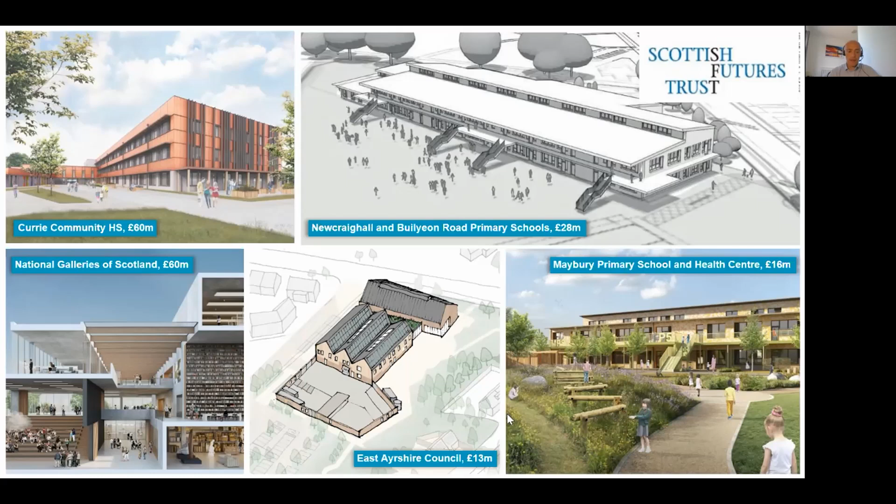setting the cost benchmark for the programme. It doesn't have to be Passivhaus to deliver under that programme, but Passivhaus is the most effective way of achieving the metrics that are required for the funding. So Owen was massively involved in reviewing Passivhaus projects across the UK and establishing how to set up that budget. Okay, so that's who we are in Faithful and Gould.

I'm going to talk now about Passivhaus, and I'm acutely aware that I'm coming at this from a quantity surveyor, cost manager, bit of a project manager perspective. So the likes of Sarah and Jonathan know way more about Passivhaus than I, but one of the things from a cost perspective we need to be acutely aware of is, despite the fact that the Passivhaus standard has been around for over 30 years, the outturn cost for low energy buildings is a relatively new topic.

And quantity surveyors, cost managers as a profession, we like to work top down. So we like something to benchmark against, whether that's a square metre rate, a cost per pupil, a cost per desk, whatever that is. We like a benchmark that tells us this is what's been delivered previously, therefore our costs are within the same ballpark, and we feel comfortable that it can be delivered from there.

Without that data, if we just take a traditional project approach, benchmark it from the top down, and then do what we've often done in the past and add on an uplift for Passivhaus, then that's not going to deliver best value for the project. That's not going to deliver the best outturn cost. And I'm not going to say it's a lazy way of doing it, but it's a very easy way of delivering an estimate of cost.

So one of the things that we've been driving really hard, working with Barry Young, with Ian McLean and Owen and our cost management team, is getting bottom-up analysis from the word go. So trying to build a picture of the project right at the outset, and trying to work with teams like Archetype and the M&E engineers to establish what's the extra over aspects that we need to be including for in this particular project. So it makes it more project specific as we go.

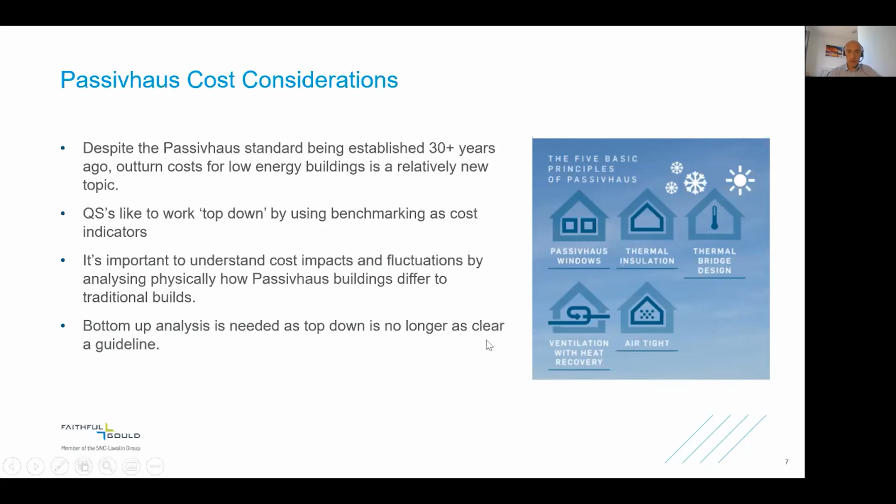This is the sort of thing we need to focus on as a project. We can get focused on the additional cost items, which I'll talk about shortly, and lose sight of some of the simplicity that gets introduced through Passivhaus, some of the benefits we achieve through it. So I've shown this here as a focus to keep in our minds.

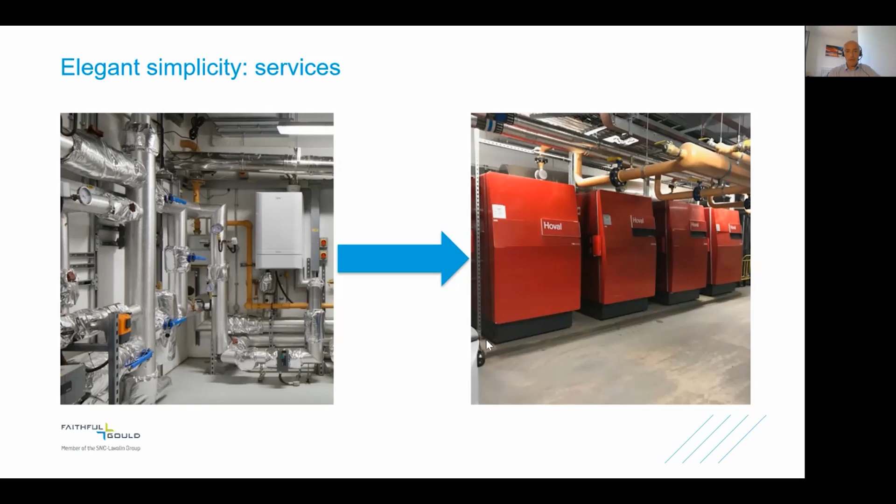If we take form and orientation, and go back to the poll about early design decisions, I think that's a fascinating outcome, because getting the right form and the right orientation in a simplistic manner needn't cost any more money. Actually, what we've seen on some of the projects we're working on is a reduced cost compared to a traditional build, because in a traditional build nobody's really focusing on the efficiency of orientation or form - they're just looking at the shape and aesthetics. So we're seeing benefit there.

When we move round the circle, the facade design and fabric construction - there's no two ways about it, those are likely to cost overall more than a traditional project. Whether that's additional slab insulation, roof insulation, triple glazing, whatever it is, both of those aspects are likely to cost more. What we need to do as a profession, as cost managers, is help make sure those increases are reduced as much as possible.

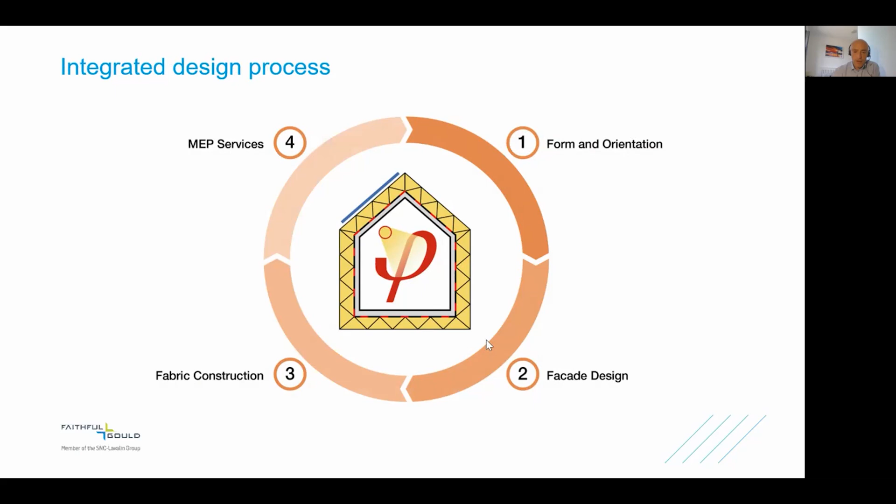And then lastly, the MEP services. Yes, the boiler and heating plant is going to be smaller in a Passivhaus project, which is a massive plus, but there are other items such as ventilation that we're finding are getting brought in, and we're working hard now to offset those balances to make it as close to cost neutral as possible. So we can't get away from the fact that Passivhaus delivers more for your money, but it is slightly more expensive when you look around that circle to get there. Part of the job is making sure we consider that when setting the budget, and that we manage the project to keep costs as low as possible.

So I'm going to talk now about setting the budget. It was interesting going through the thought process pulling together these slides, and some of the ideas that came to mind brought a different way to express it for me. As we worked through, I started looking at some of the projects we've been delivering, whether Passivhaus or traditional, and started to break down the costs.

Interestingly, those are the two areas most impacted by a Passivhaus design and the Passivhaus requirements that happen in the construction phase. So that's where our focus is.

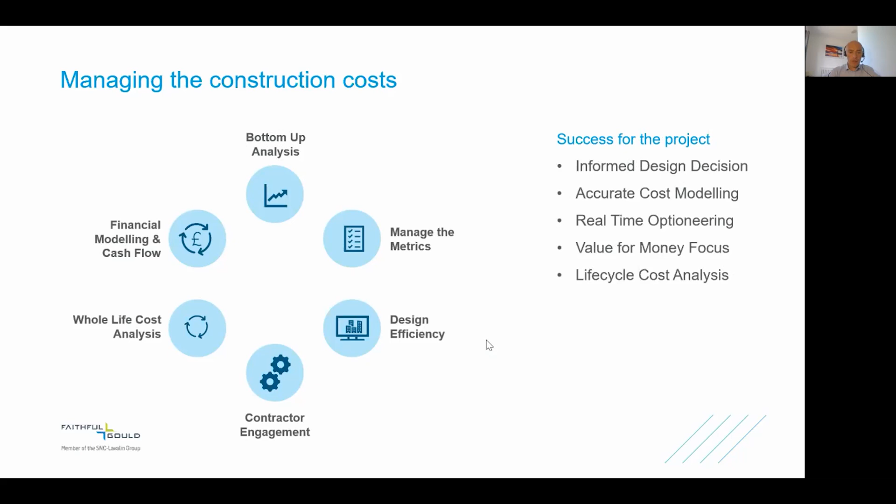Jumping onto life cycle - if there's ever an advert from a cost perspective to do passive house, it's the life cycle cost of that project. We've looked at a number of projects, and one of them: we ran a traditional cost model over 50 years and a comparative passive house cost model over the same 50-year period. It was 55 million for the traditional and 50 million for the passive house project, which - to justify me being a QS - is 10% less. That's the advert for why we would deliver a passive house project. If we could say the capital cost would be 10% less, nobody would ever bat an eyelid. What we need to start doing as an industry is looking at the life cycle cost of a project.

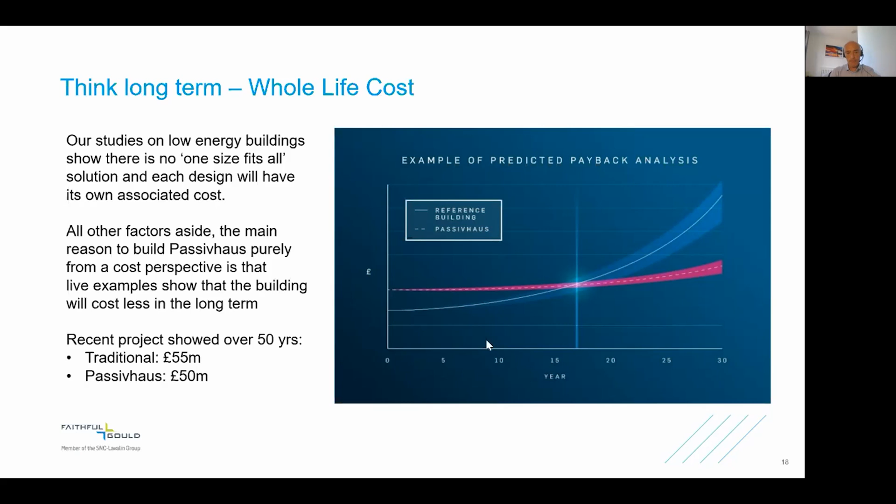So in terms of what I'm going to talk about today, that's the sum total. I do have a couple of practical considerations just to demonstrate where we are.

This is a nice one, going back to the poll again. This is a project we've worked on with Jonathan and his team, and they did some optioneering around the orientation of the building based on the site that had already been selected. Working through these options, they came up with the best solution, the one that was going to give us the optimum way to get to Passivhaus accreditation, which was fantastic. And it was a seamless process - from my involvement, I barely even noticed it was happening.

Conversely, we are involved in a project which had gone to almost stage 2 when the client decided they wanted to take the project down a Passivhaus route. The site had already been selected, the building had already been oriented, all those early decisions had been made, and we were left with the option of redesigning and going back a stage and a half to look at the design all over again, or trying to find ways to cost and engineer around the decisions that had already been made.

And that's when it became apparent - the ease of decision making if you get it right first time, early doors, and the fact that it has no cost impact, and in fact it saves costs if you do it that way.

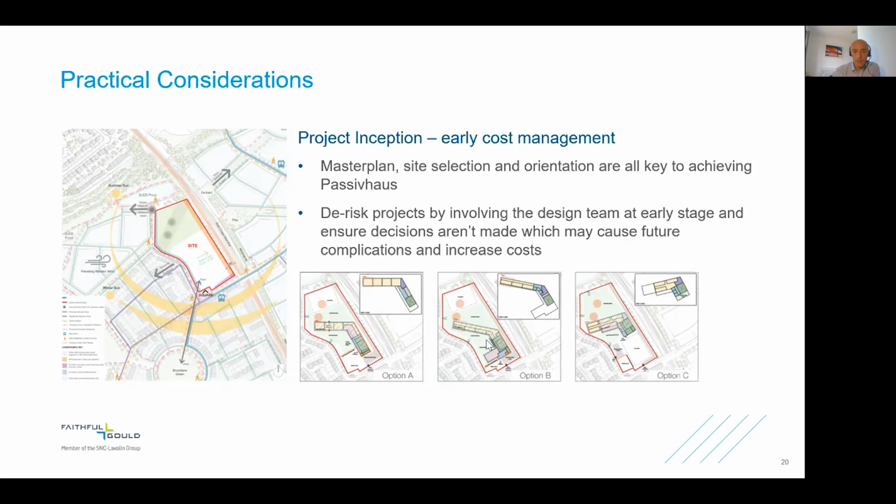Secondly, and just around that early contractor engagement, one of the things we really need to think about is the supply chain. If we're putting out details, construction methodology, and different ways of working to the supply chain, and they either don't understand it, or don't have the time to understand it, or don't have the time to cost it, then we're not going to get an accurate reflection. And that's either going to affect the outturn cost of the project, or it's going to affect the quality we see on site, which will end up costing more anyway, regardless.

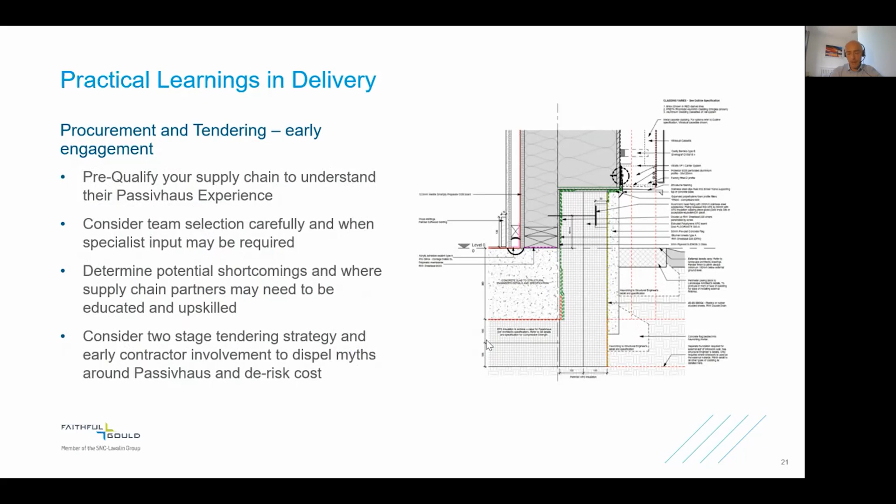So I really do think one of the things we can do is start to think about early contractor engagement, engaging right the way through their supply chain, getting to the subcontractors and making sure they fully understand what needs to be delivered on their end in order for us to achieve our projects. And despite the time that takes, that will be a benefit to cost overall.

So Sarah, that's it from me. Thank you.

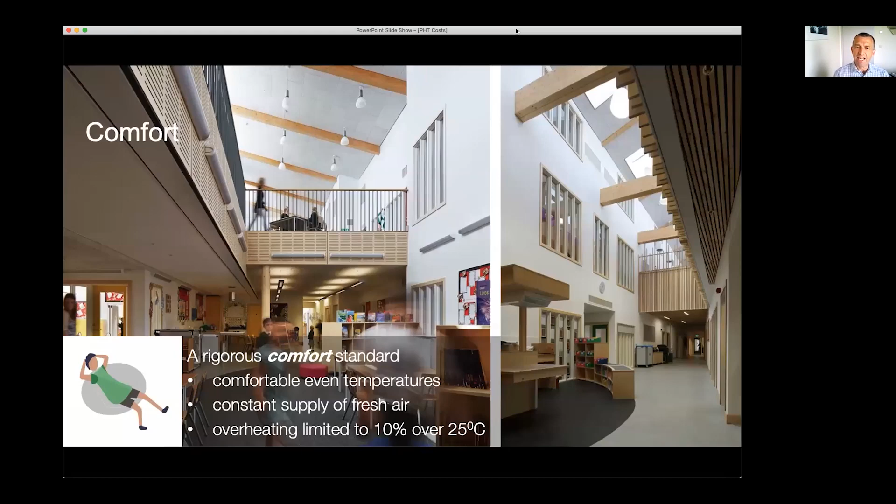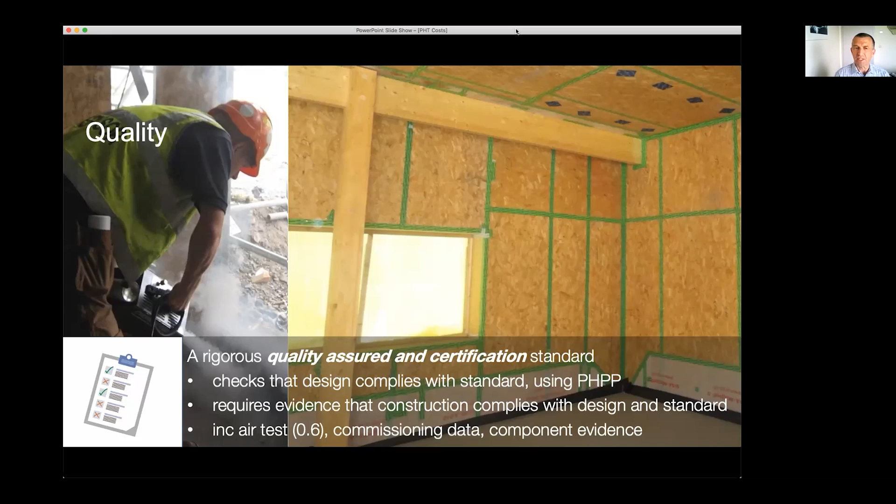Just a very quick reminder about what Passivhaus is. It's three things really. It's a comfort standard, about creating really optimized, even temperature and fresh air within the building. It's about really rigorous limits to energy in terms of thermal and overall primary energy. And importantly, it's a rigorous quality assurance and certification standard with a third-party independent check that the design and construction meets the standard. As a result, Passivhaus guarantees that buildings perform as designed. It's reducing energy by design, not just offsetting carbon by add-ons. In terms of cost, it minimizes maintenance and running costs in the longer term with a simpler system of controls. As a result of all that, it's a more robust way to meet carbon targets.

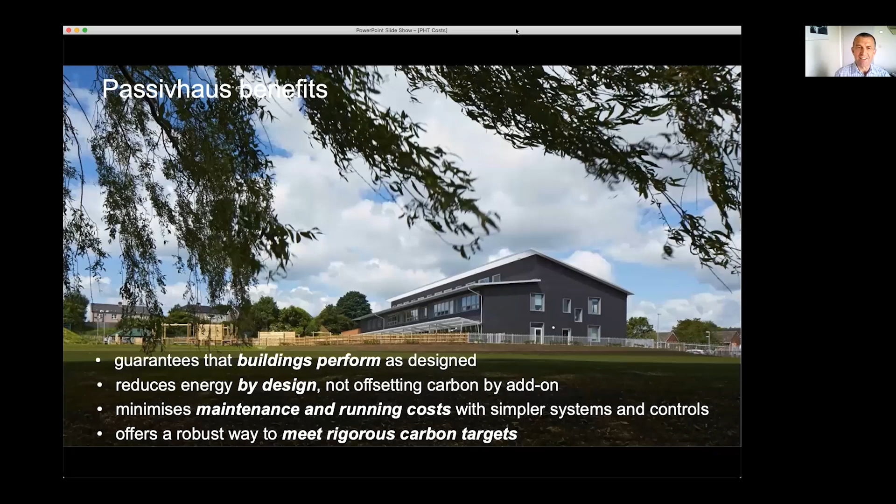But there are some challenges. There's still quite a lot of myths and misconceptions out there, and that's partly what this series of seminars is meant to do - to spread knowledge. There's still a challenge in upskilling design teams and contractors. And the subject today really is the whole issue about can it be delivered at affordable cost.

Stuart has set out some very clear grounding for making sure that we can do that. But what I'm going to focus on now is a little bit more about the how, in terms of how the design team responds to that.

As Stuart said, there are some potential extra costs, no doubt about it. You do have more insulation, but often not as much extra as people imagine. You do have higher performance windows, triple glazed with thermally broken frames. You have got to achieve higher standards, particularly of air tightness, and you do need mechanical ventilation with heat recovery, which in some cases is an extra, and in some cases you'd need it anyway. So there are extra costs.

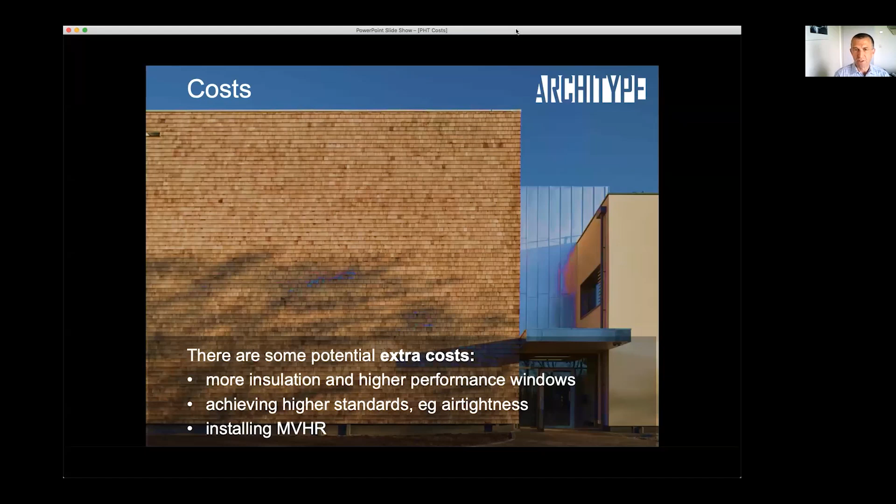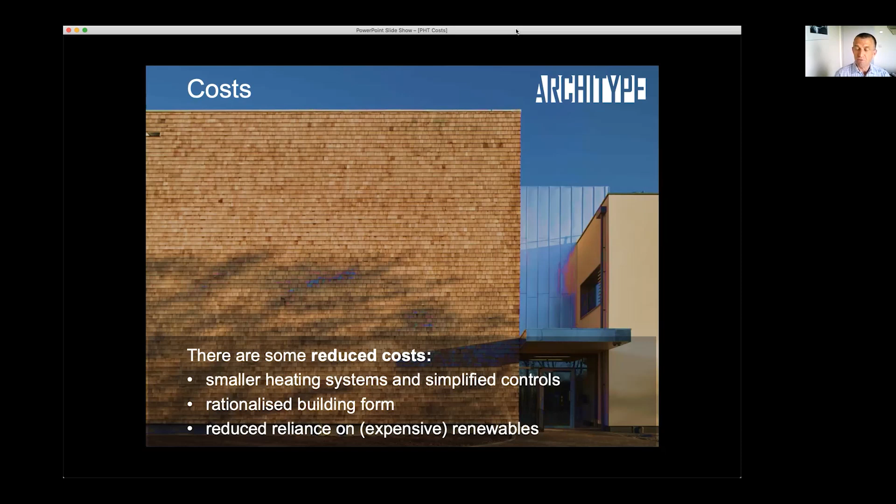There are, as Stuart has said, some reduced costs: smaller heating systems and controls, a rationalised building form that will always save money, and a reduced reliance on renewables to meet carbon targets, which are always going to be an expensive extra to the project.

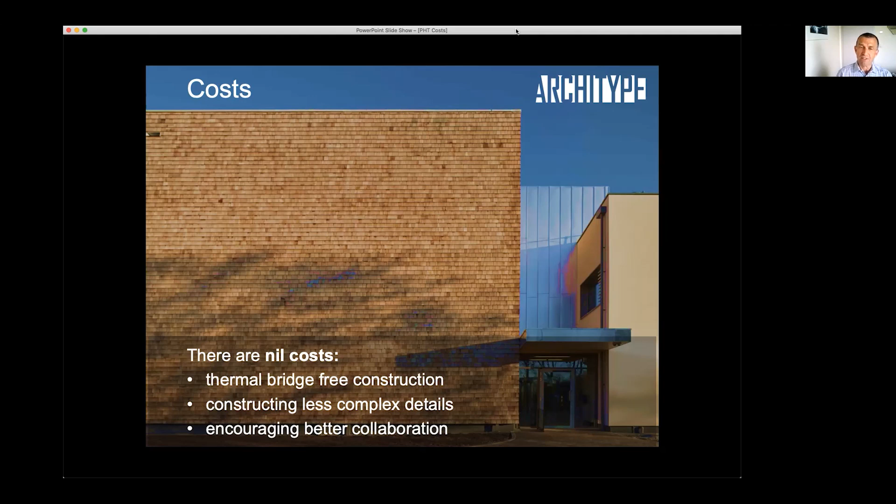And there are some nil costs. If we as architects design a thermal bridge-free detail and less complex details, that shouldn't cost any more. In fact, it may also save money. And I think one of the great things about Passivhaus is it encourages better collaboration across the whole team.

So I'm going to introduce you to the Jono rule of cost estimating - Jono's my nickname. I'm always hesitant as an architect to promote my own rule of cost estimating, particularly when I'm sharing a platform with a QS. But my rule goes like this: if you think a project is going to cost 15% more, 10% more, whatever it is, because it's Passivhaus, and everybody assumes that at the outset, then at the end of the day, it will cost that extra.

It might well be that that money isn't spent on Passivhaus measures, but as soon as people have an idea about the budget being plus 15%, there's a natural tendency to spend it - it might get spent on more expensive cladding, a fancier detail, or more expensive internal fittings. The whole point of my rule is that if you simply treat price as a matter of priority and balance everything against that budget, Passivhaus needn't cost significantly more, or any more.

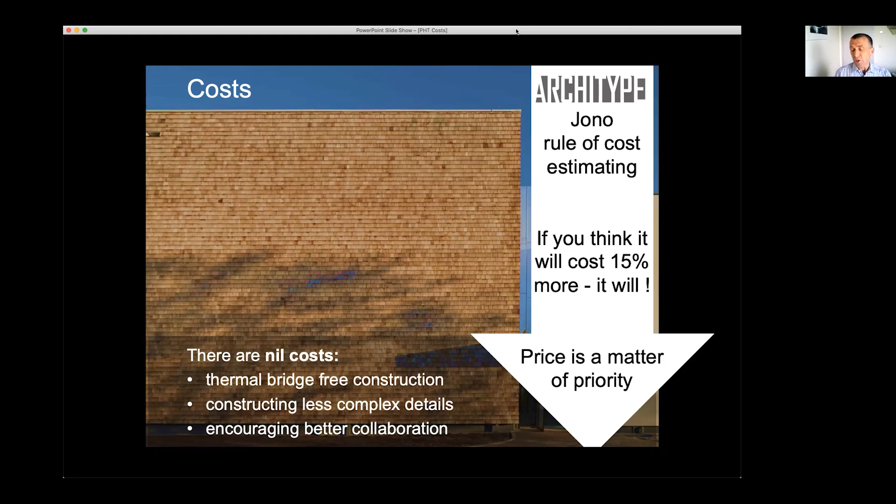It just becomes balancing, again, as Stuart has said, one priority against others. And that really is always what good design is about - it's actually balancing all the different priorities to produce the best, most optimum solution.

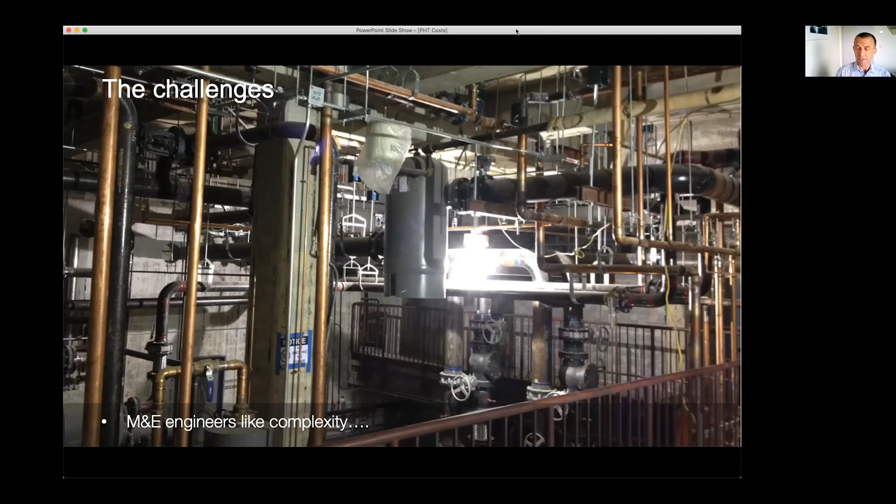Now, the challenge to that is that architects generally like design complexity, and if they can make design more complicated, they usually will - and that will always cost more money to build and maintain. The second challenge is that M&E engineers are also quite complex; they love their pipes and wires and complicated systems. But to be fair to them, they're often needing to come up with complicated solutions to solve problems in the design that the architect's built in, which perhaps shouldn't be there. The third challenge is that contractors often price the perceived risk of the unknown and things they haven't done before. So those three challenges are the things we really need to tackle if we're going to deliver Passivhaus within budget cost metrics. So how do we go about that?

Well, Stuart showed this diagram, and really when we developed that, it was to demonstrate how we have rethought the design process. Typically, the design process is very linear. The architect designs the building, details it, passes it down the line to the engineers to fix it and make it work, and then down the line to the builder to build it. And at each stage, one person is just solving the problems left there by the previous.

Whereas with an iterative rather than linear process, the whole team is working together, going around this circle many times to optimize the solution. So if we improve the form and orientation, we can optimize the facade design, reduce the need for complicated fabric, reduce the need for extensive services, and that in turn means we can maybe adjust the form and orientation. We go around this several times.

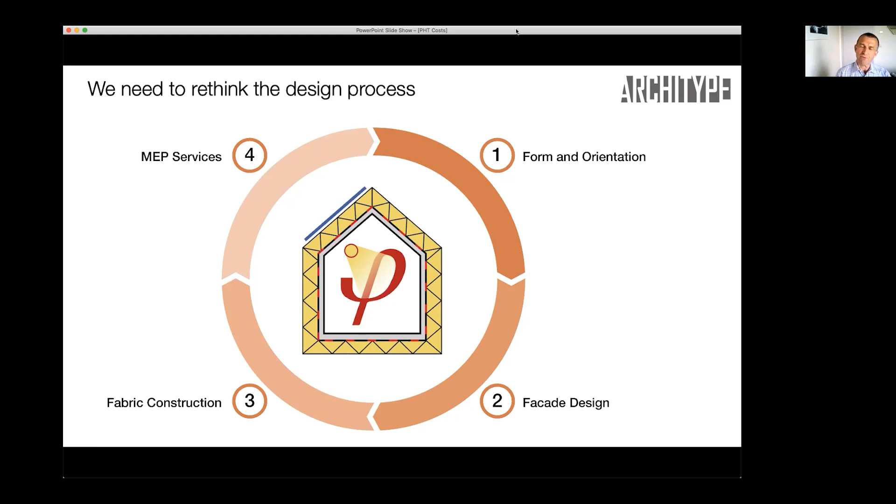And all along the way, we're testing, checking cost, ironing out the things that are going to cost more, looking for the most optimum solutions, look at what we can take out of design to make it work better, rather than what we have to put into it to fix a problem.

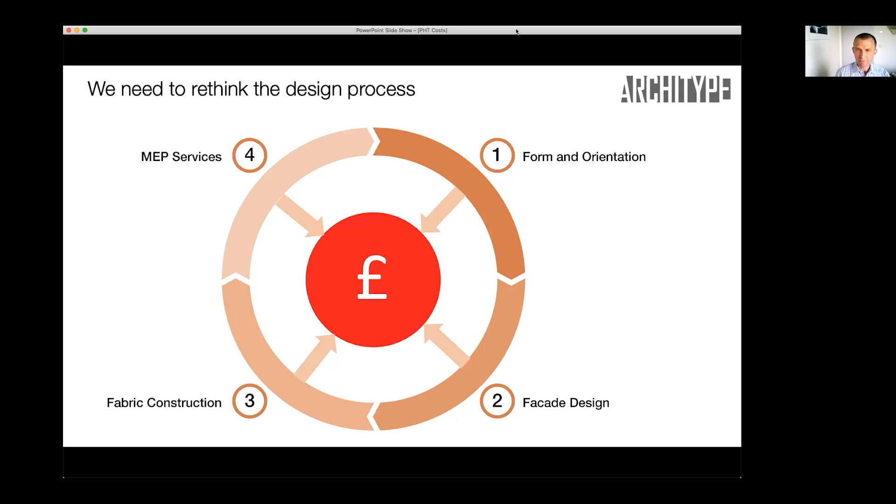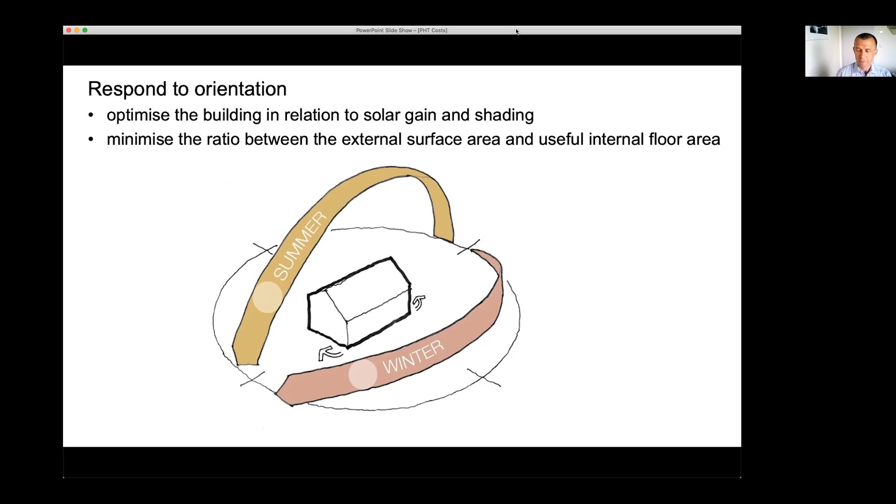So the things that we're looking at are really, first of all, responding to orientation, optimizing the building in relation to solar gain and shading, because if you don't do that, you need to spend a load of extra on shading and other devices later. Then we're looking to optimize the form itself, minimizing the ratio between the external surface area and the useful internal floor area. And this is really significant.

That means you need twice the thickness of insulation. So you're paying for twice as much insulation over twice the surface area of the building. That's a quadruple cost whammy of 4 times extra cost. So optimize the form and you will always reduce the cost.

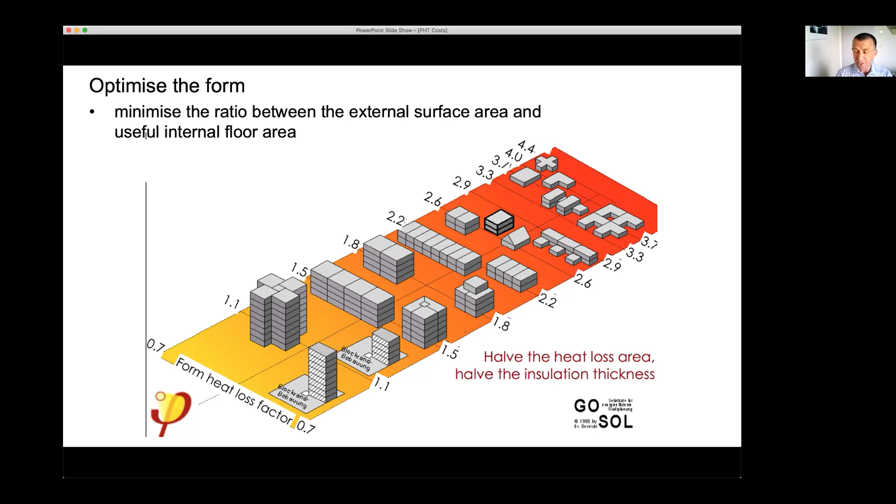And actually, I always say one of the most obvious ways you can reduce embodied carbon in a building is just to build less building, less fabric, more optimized ratio. It's a win-win. And that doesn't mean the building has to be boring. This was one of our first passive house schools. We made it more compact, 2-story, looked very simple section, but it doesn't mean the building ends up being boring. You can still have a building with a sensible form and interesting spaces internally.

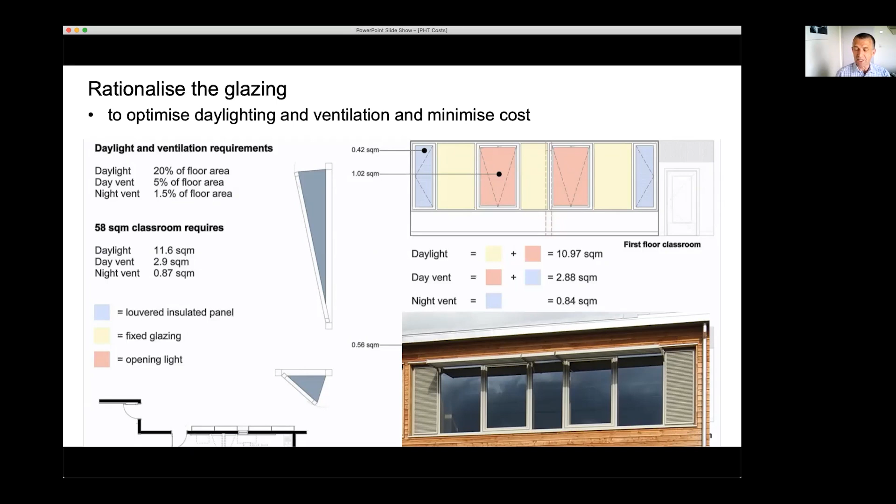Next, we're working really hard to rationalize the glazing, look at how much you need for daylighting, how much you need for ventilation, how it needs to be shaded. And this means, for example, moving away from glazing that goes right down to the floor, which architects love, which costs money, causes overheating and does nothing for daylighting, and just looking at what's the right amount of glazing for daylight and for ventilation.

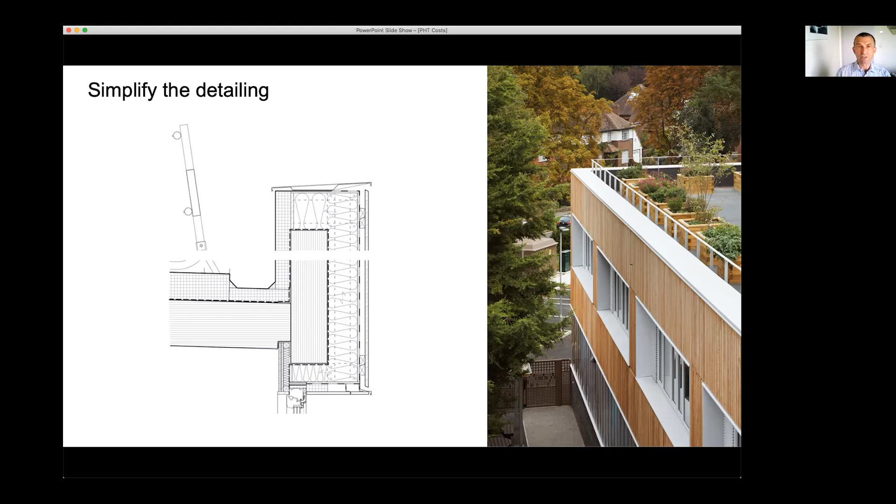Then we're focused on every single detail, simplify it. If you simplify it, you design out the thermal bridging, you can make it possible for the builders to make it airtight without using huge amounts of money on foam and tapes. Simplify reduces cost. And then, sure, you can simplify the services and controls. A Passivhaus primary school only needs one small domestic sized boiler and a single radiator in each classroom.

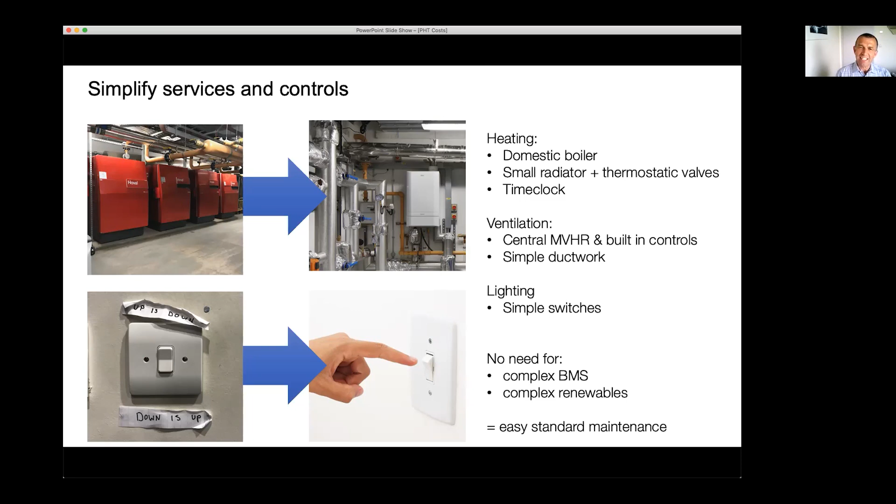And at a larger scale, Stuart showed this drawing, photographs showing the difference in scale of heating from a traditional building to a passive house building. And then we can look at simplifying other things, simplified switching. Once you've simplified the services, you can have less complex BMS, and with less complex renewables, you can actually make the whole thing easier, more cost effective to build, and easier and cheaper to maintain over time.

And so we've found over the years that we've managed to deliver many school projects within standard budget. So our very first passive house schools in Wolverhampton over 10 years ago were built within the standard budget that was available at the time. The council came back to us 2 years later saying, well, our budget's been reduced, but we want another passive house school, can you do that?

And because we'd learned and optimized lessons from monitoring the first schools, we're saving money by taking out some of the complexities of controls and simplifying glazing, and deliver the next generation of schools within the budget that they then had.

And then more recently, we delivered the UK's first passive house secondary school within the costs that were allowed by the council there. And our experience time and time again is that if you follow this focus on simplicity of form and careful detailing and collaborative process, then you can actually offset the things that do cost more with the savings on the things where you can actually save money by simplifying form and detailing. And again, not compromise the quality of the architectural space that the clients expect from their building.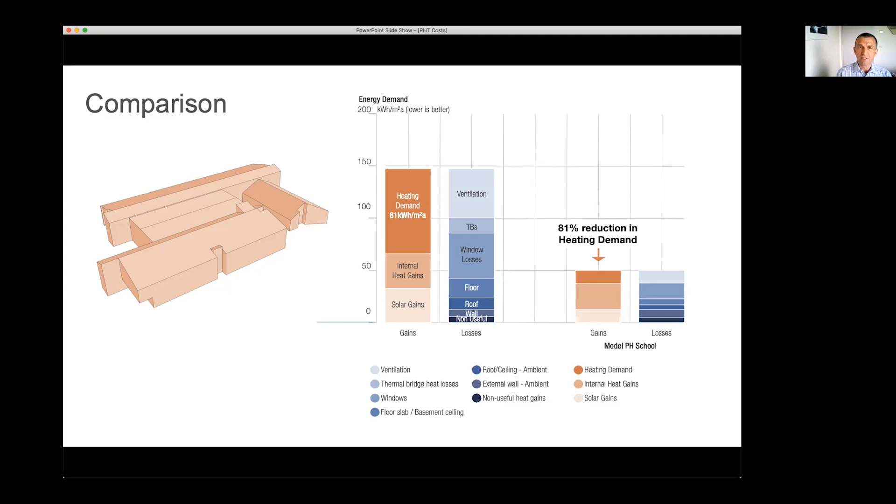Now, when you actually analyse this building, and then we look at all the measures that we would need to do to that building to make it work passive house, there's a whole series of things. You need to improve the form factor, the orientation, the window spec, the window design, improve the U values, get rid of thermal bridging, improve air tightness and MVHR. So if you took that building as designed and did all those things to it, it would cost a fortune. But every single one of those things are things which, if you start from the beginning, you can design in and make work.

So this is just comparing, this is the Scottish Futures Trust cost metric. This is that primary school, and sure enough, it comes in below that metric. But our passive house school that we designed for the same client also comes in under that metric, about 10% under the cost metric. Yes, it's 3.5% more than that school, but still, because of the careful design, coming in under the cost metric. And we're finding this with all our schools in Scotland. We're managing to deliver them within the metrics set by the Scottish Futures Trust.

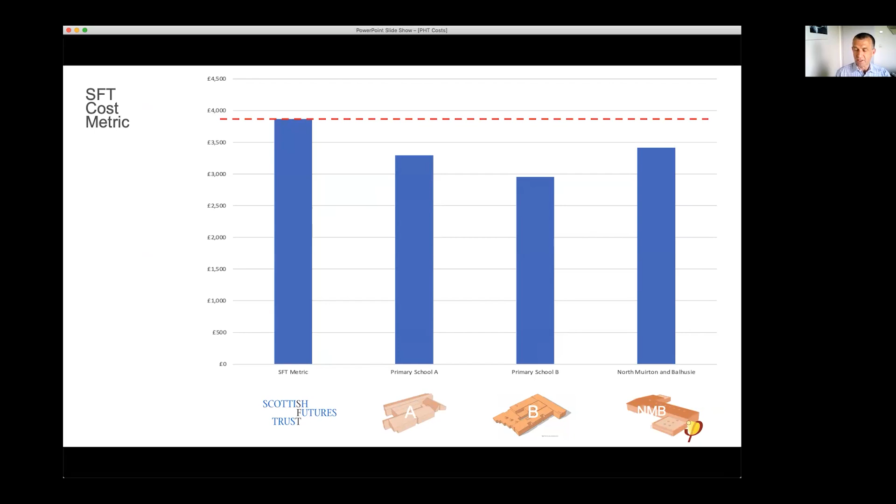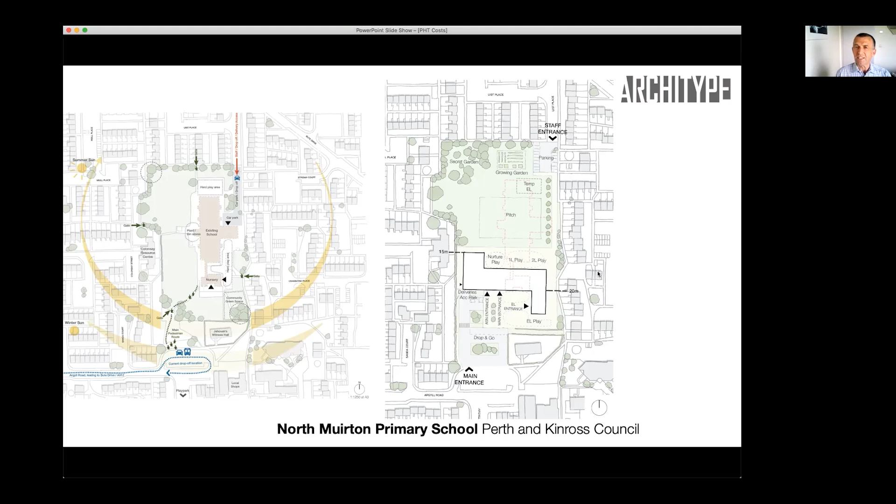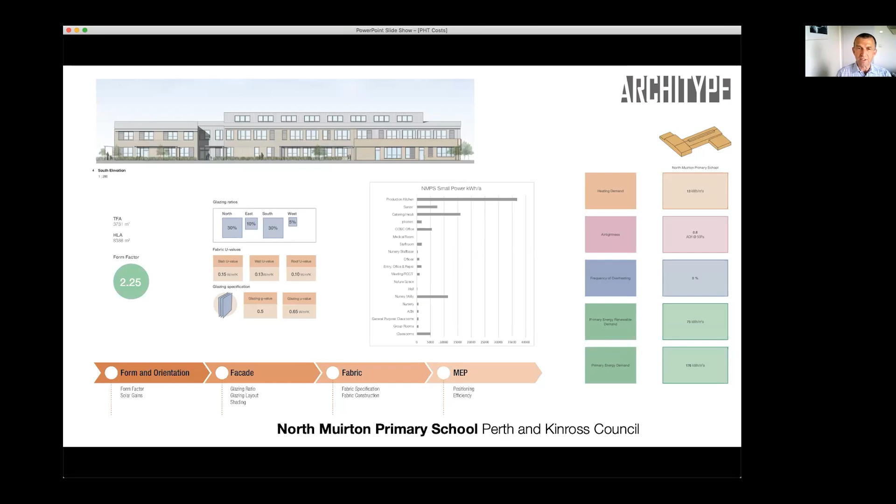And just to give you an idea about this particular school, it's a replacement school on an existing site. We worked very hard to look at the overall form factor and meet all the requirements of a large primary school with a specialist unit and a nursery, and managed to design it to a form factor of 2.25, which is below our target of 2.5, and bring everything in within the Passivhaus metric. And this is alongside the projects we're doing with Edinburgh and Stuart, on track to be amongst the first of the Passivhaus schools being delivered in Scotland. And again, no compromise to the architectural quality and educational spaces within.

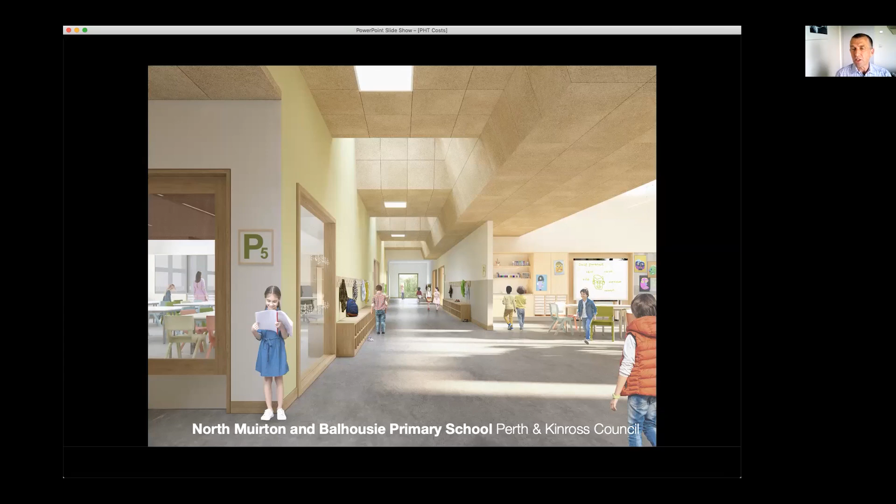This is Maybury, one of the schools, which also includes a full health centre as well as a primary school that we're delivering with Stuart for the City of Edinburgh, and Currie Community High School, the first Passivhaus secondary school being delivered in Scotland. And again, no compromise to the quality of the architectural spaces and pedagogy that's expected of schools in Scotland. But what is good is we're going to be delivering it within cost metric and the SFT energy metric, to which capital funding is tied. You have to achieve the energy metric over 25 years to get the full capital funding on the project. So it's become a really essential thing to do in Scotland.

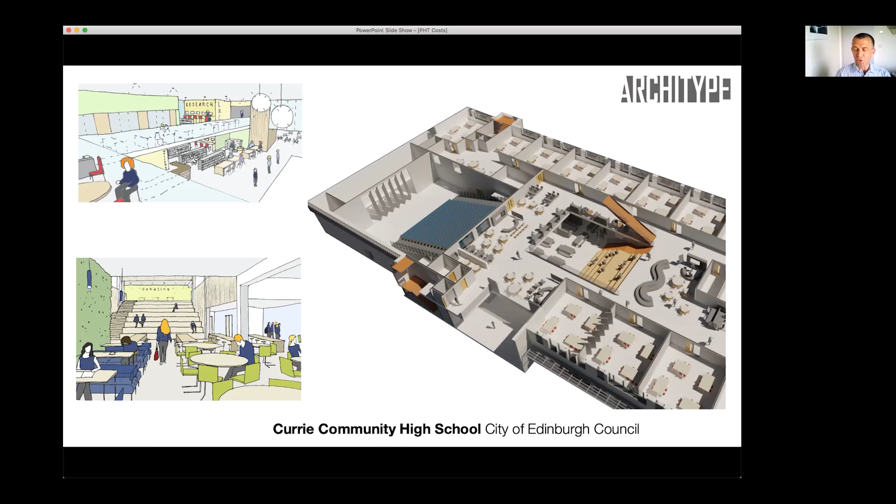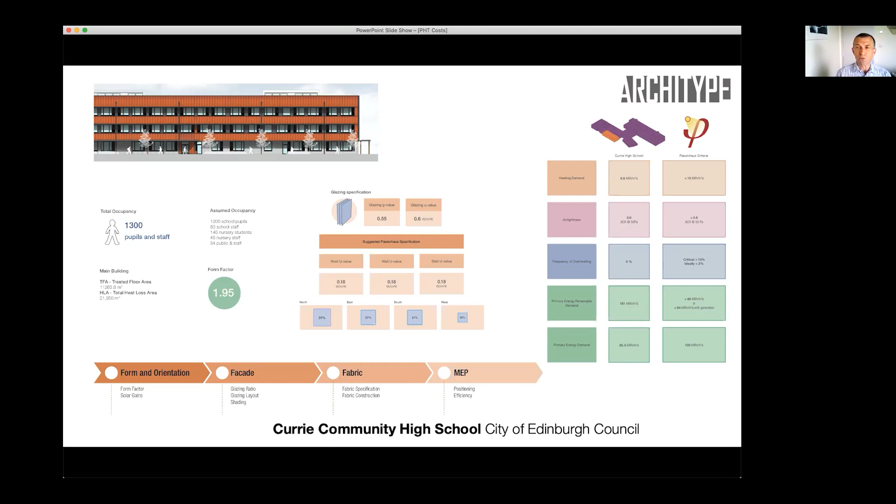And there's all the underlying data that goes into that. So on this one, we managed to get the form factor down below 2, which means you've got a very, very simple, elegant form, which is just going to be cheaper to build than if you developed a more complicated form, more complicated detail. So just to sum up, in the past, buildings used to be simple, but very energy consuming and uncomfortable and unsustainable.

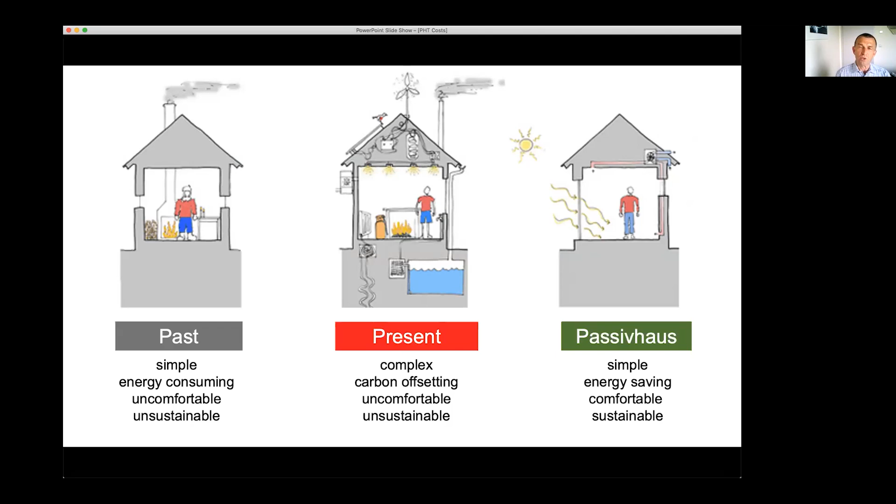In the present time, we've got fixated on complex solutions, carbon offsetting, and buildings which often have performance gaps that are uncomfortable, they overheat, and they use too much energy. What Passivhaus offers is a much simpler approach to form, to detailing, that's energy saving, and through monitoring over the last 10 years of schools in the UK, we can confidently say they deliver the comfort and the energy savings that would be expected. And as I've said, through this process, we've managed consistently to deliver buildings within overall cost metrics by offsetting and balancing additional costs that you do get with cost savings of good design.